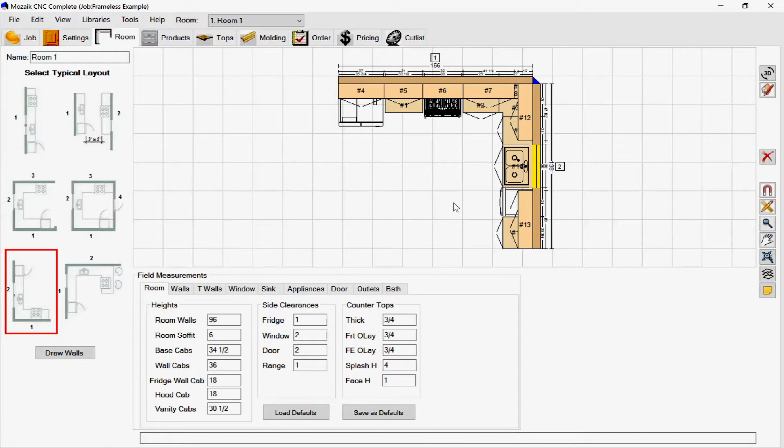Right now, let's skip down here and look at the actual room itself. This is what the job looks like, and let's look at that in 3D. We'll probably have to slide that shadows over because of the graphic card.

All right, so that's what it looks like. There's the kitchen that's already designed. So that's a good place to start, but let's back up here.

We go back here to the Settings tab, and basically the settings determine all the little details about how this is done, what kind of doors it has, what kind of hardware you're going to use, all those things. It also has a concept of what we call a material template. A material template simply says, this is what I make each part of the cabinet.

That's what determines that. In fact, let's deviate from this a little bit, and let's go to the libraries and look at 2 different libraries. The first one is materials. Now, these are the materials that we're going to use. For instance, the first one's a 3/4 plywood. It's 48 by 96. The thickness is 3/4.

And the other thing here, these other things you see here are the trims. Like, I probably would set the trims to 1/8. It just saves material. Now here's what a trim is: it means this is how close I can nest a part to the edge of the material. So 1/8 of an inch is plenty close, right?

So you go through here and you basically set these materials up to match the materials you use. Then there's another concept, and that's called a material template. And here's what this is: it basically says what each part is made out of. So you notice how it picked up these thicknesses here - it automatically updated that thickness. So basically, that's the material library and the material templates.

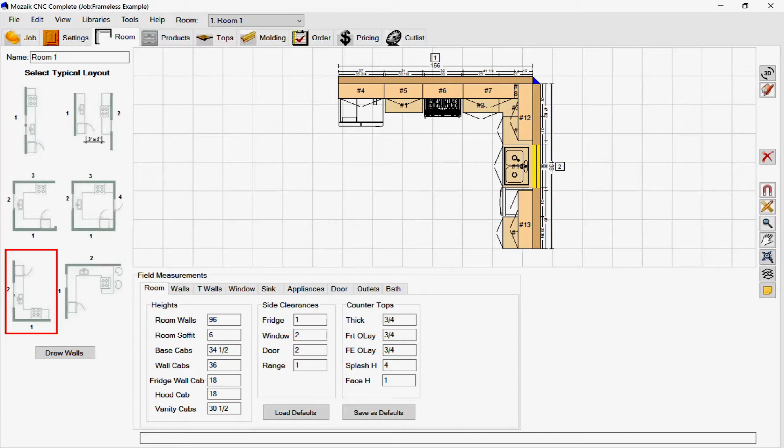We progress on through here, we see a product tab, and let's just pick - when we get to the product tab, we can actually look at the front. So let's pick that cabinet, and let's go edit. And that gets us for the cabinet editor, and then we can kind of look at stuff.

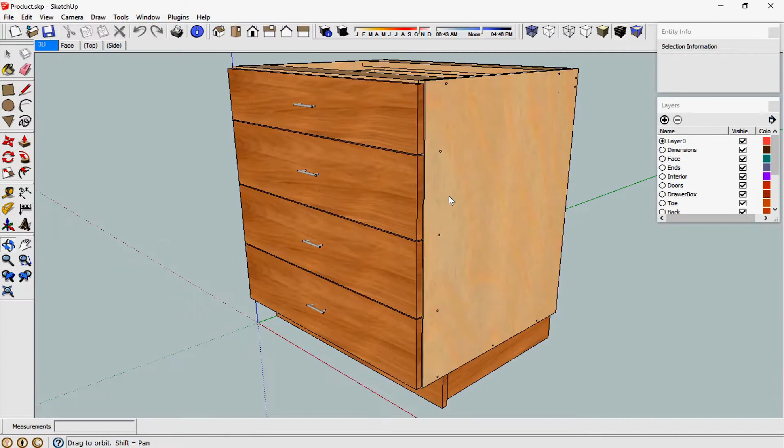Let's go to SketchUp this time. All right, now this is looking at the cabinet in SketchUp. Now the first time you open SketchUp, you may have some default screens that you have to say don't open at startup.

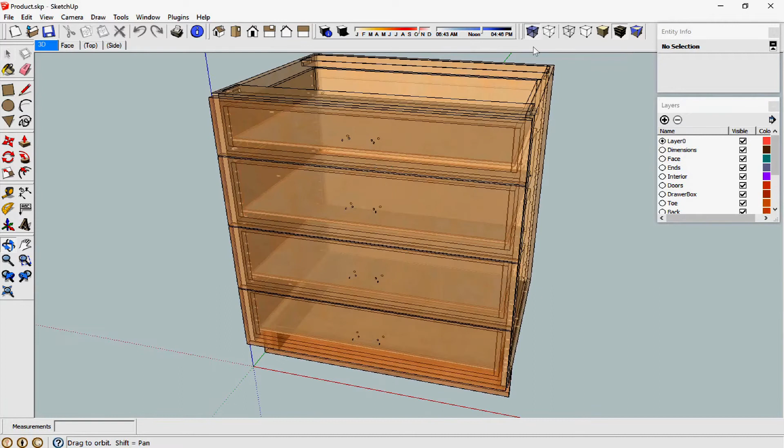Now there's some things I've added also in SketchUp and on the toolbars, and that's some of these toolbars where you can actually see through. All right, I'm actually going to show you on the toolbar. These are what - I'll leave these up for just a second so you can refer back to this. These are the different things I have clicked on here. And the reason I did that is it just makes it easier. So when you're looking at a cabinet here, especially if we're configuring a cabinet, I want to see what it looks like inside. So that's a really, really, really nice way to do that.

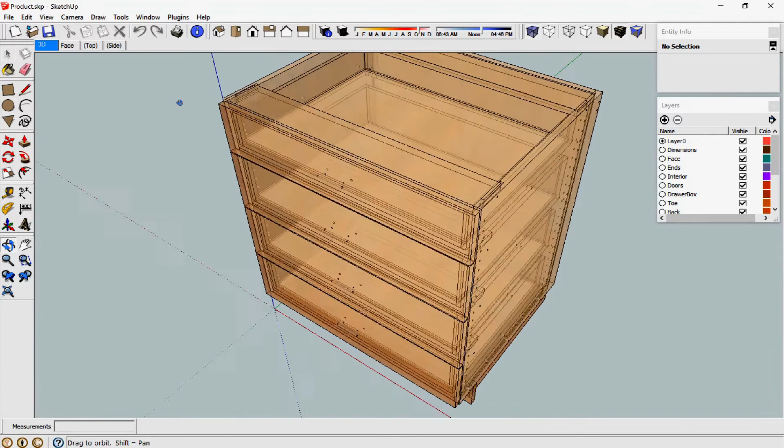All right, so that's SketchUp. Now I could also have viewed the same product over here on the viewer if I wanted to. I could also view it like this. Just another way.

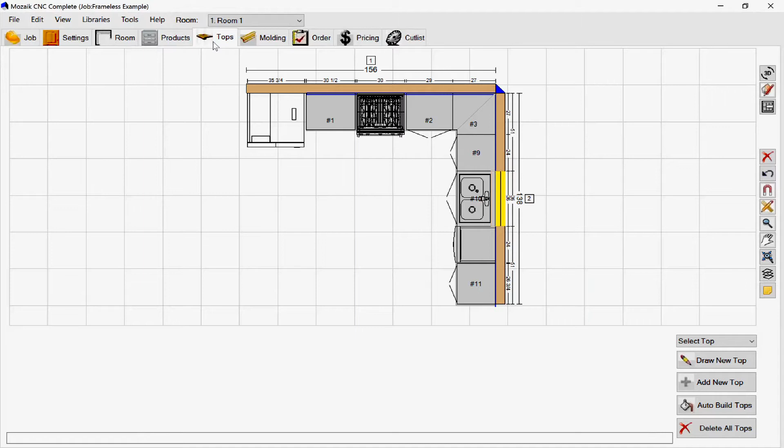Okay, we'll close that. All right, and then as we progress on through here, then you have tops, and of course it builds the countertops on here, and also moldings. So you can actually have moldings, and we'll look at that once again in the viewer. And we'll get that - so there's your countertops and your molding. So that's all part of a cabinet job, of course.

All right, now there's another thing here called order. Now, right now, this is a list of all the cabinets in that job. We're going to come back to this later because the order tab actually gives you the ability to make cabinets without any pictures. A lot of times you just need a cabinet of a certain size, and so we'll come back to that later.

The pricing tab has to do with the business end of it. We typically wouldn't - that would be something you would work with Mozaik on. And then we get to the cut list tab, and the cut list tab opens up the optimizer.

So we come over to the optimizer. I'm going to select that 3/4 plywood. Now we're beginning to get into the CNC part.

So there's the optimizer. Now there's our material thickness that got carried over from the material catalog. There's the material size, and there's those trims that we put on there. And the next thing I do is optimize it.

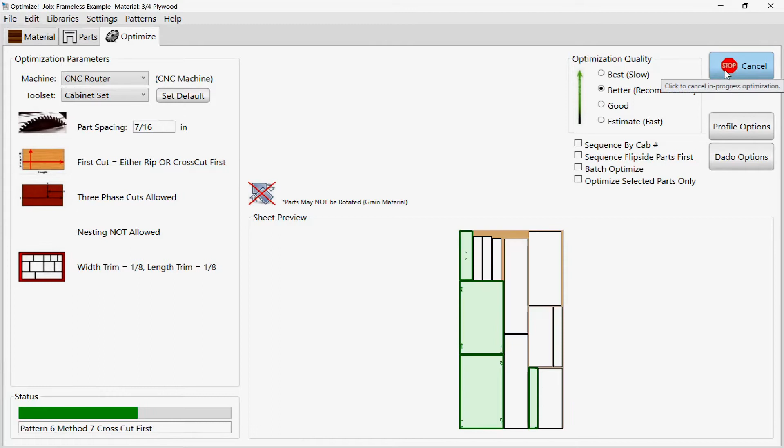Optimizing is another word for nest. And here's what the job looks like, and there's what one of the sheets looks like.

Now I can't really go to G-code because I haven't set that part of it up yet. When we come back in here with our individual base cabinet, we'll set the rest of the CNC stuff up. Now let's focus on actually making your first cabinet on your ShopSabre CNC.

First thing I'm going to do is teach the software how I want to build a cabinet, so that's the construction method. Basically we're going to use what I call a CNC construction method, and I recommend that's where you start. Typically what we do is we build a base cabinet, a wall cabinet, and a tall cabinet, and put them together, and if these all fit, everything else pretty much works.

But let's stick to start with one of our proven methods. Now, the software has unbelievable capability, and you can virtually build anything. So you can create a very unusual construction method, or a cabinet for that matter if you want. But let's keep it to the basics first, because our goal is to cut that first cabinet on your new machine.

Okay, so before we get into a job, let's go up and let's actually configure a base cabinet the way we want it. And here's how I do that.

I go to Libraries, and I select products, and you'll notice up here there's actually a list of different type of catalogs. This is a frameless cabinet catalog, so that's a list of all the different kind of cabinets that are typically you run into in a job. I'm going to select one, and that has to do with a pair of doors and a single drawer, real simple base cabinet. And before we do anything else, let's look at it in SketchUp and see where we start.

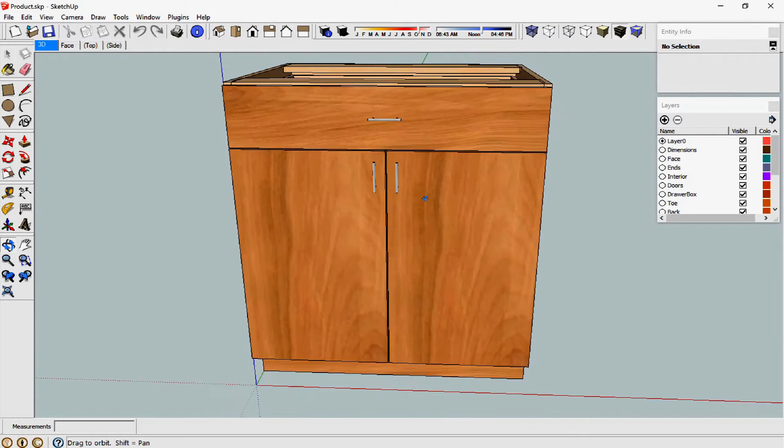There it is. Okay, that looks pretty good, but I see some changes. Yeah, and you see how this toe's cut back here? I don't want that. I actually want my end panel to go all the way to the floor.

Okay, I don't really want a nailer. I want to put a thicker back in there and see what the inside looks like. Yeah, that's probably okay, we'll probably put some screws in there. If you notice a lot of our videos, we screw the cabinets together on unfinished ends, so we'll probably add that feature too. Okay, so that's where we start.

Now, how do you change those? Well, it's really not very hard, so let's go to parameters. First thing we talked about was actually our toes, so let's go into the toe section, that category, and where it says side toe recess, let's make that 0.

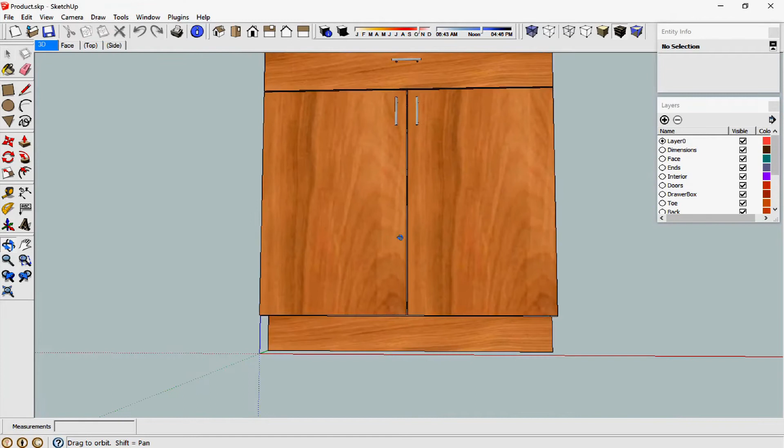Okay, now let's see if it did anything. We'll validate this visually. Okay, now you see our side toe, now it's not stuck back underneath there. Okay, that looks pretty good.

Okay, now let's go back and let's actually tell it to extend the ends to the floor. So I'm going to select a category called ends, base cab ends to floor. Okay, now, oh, by the way, here's something else. If you can't figure out what these are, if you hit this little help button, it shows you what you get if you say yes and what you get if you say no.

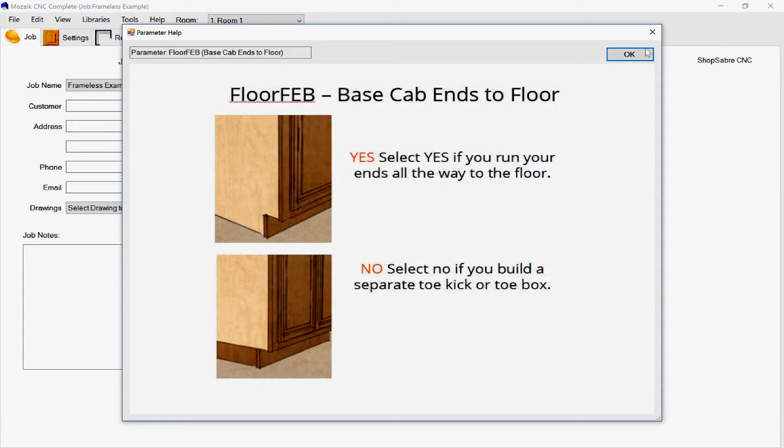All right, so let's say yes, and let's go back and validate that. Now, that should give us what we're looking for our base. And there it is, so that looks good. So now our ends go straight to the floor. Okay, so we got rid of that.

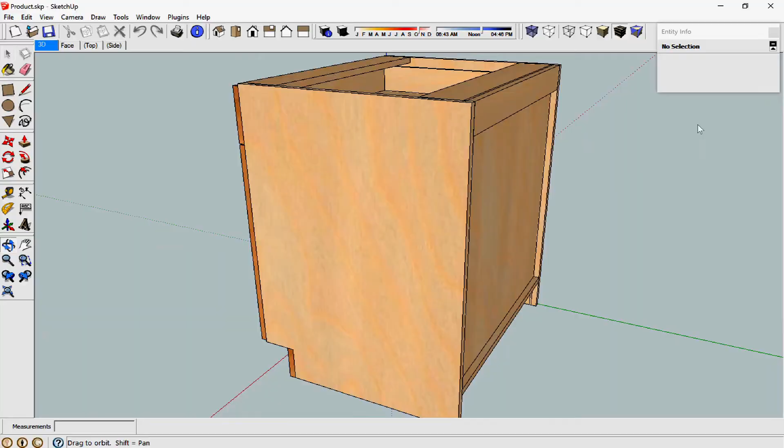Now, let's get rid of this nailer. So what we'll do is we'll go to the nailer category, and if we put the width of the nailer 0, it will disappear. Okay, let's validate that. Okay, and it's gone.

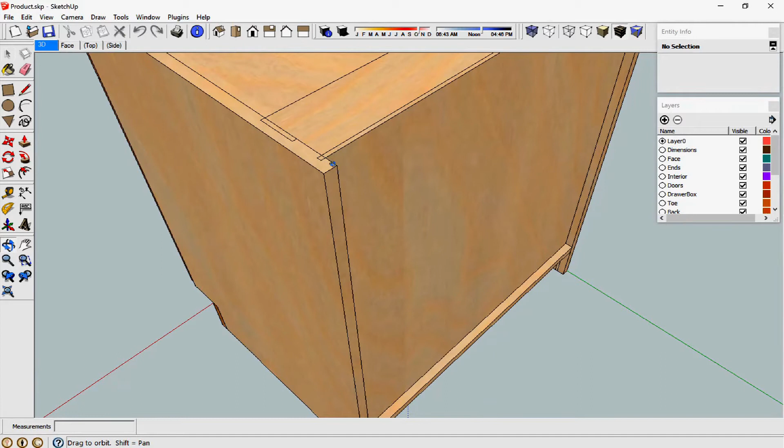Now, here's something else. So I really, when I'm all said and done, my back's going to be the same material as the sides, so it's going to be thicker, and I don't need that much recess. So let's fix that — that's going to be a parameter under backs. And there it is, back recess. Let's change that to 1/4, and let's validate that.

Okay, that's excellent. Now we'll change the back material in the material template, so that'll fix that. Let's look at the inside.

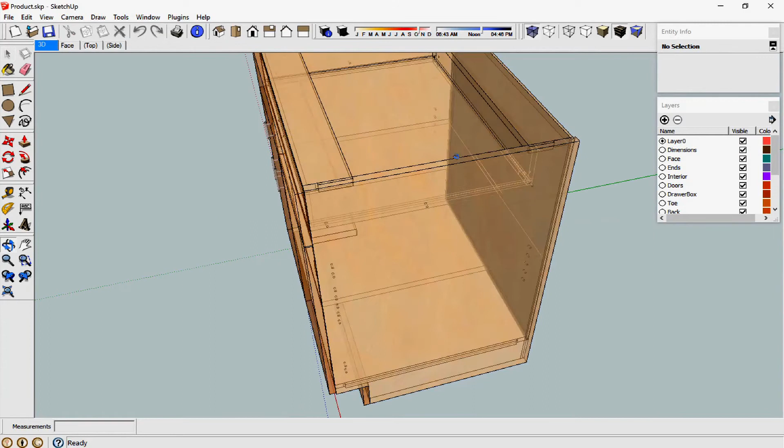Okay, it looks like we've got dado joinery. It's blind dado, that's good. I like that. Now, by the way, let's talk about dados a little bit.

It's really, really critical that your material thickness be correct in the material catalog, because the width of that dado is based on that. What I typically do on this first cabinet is I mic the material and add 5 thousandths, and usually that works out pretty good. If it's too tight, you may not be able to get the cabinet together, but in our case I can live with it a little loose because I can tighten that up. But that's where I start, I add 5 thousandths to what I measure, and that gets me in the ballpark.

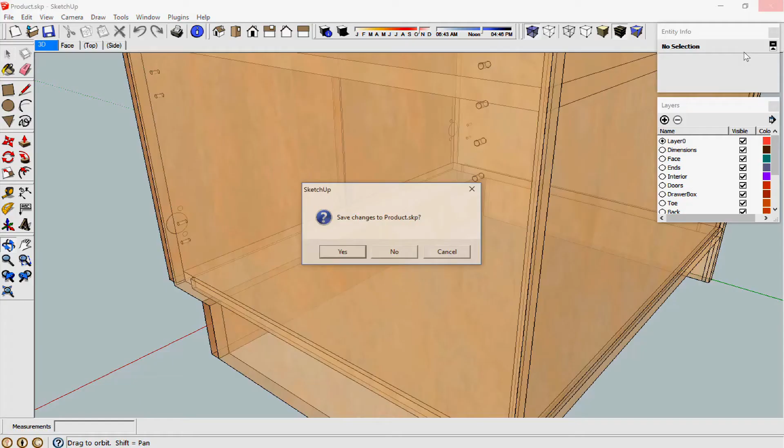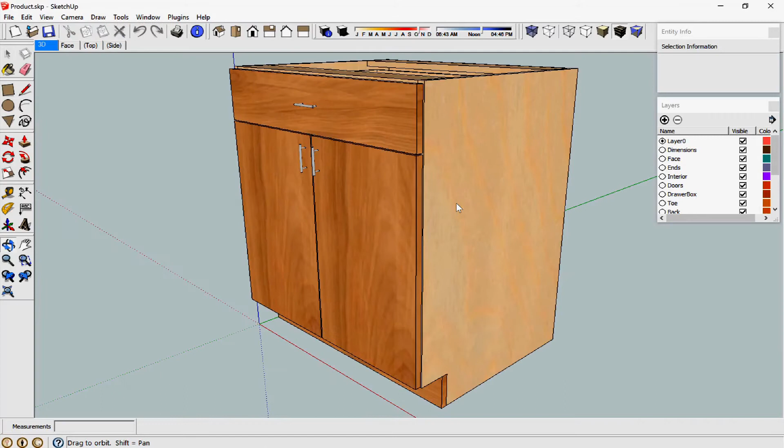Okay, now let's go back and talk about assembly a little bit. Let's go back and look at our cabinet. Now, one of the things CNC gives us the ability to do is actually make things simpler. If you notice, here's a blind dado, so that part's probably going to be real easy to locate.

But you know, if you watch a lot of our videos, I screw the cabinets together and I put those screw holes in there just to make it easy to put the cabinet together if it's an unfinished end. Let me show you how you do that.

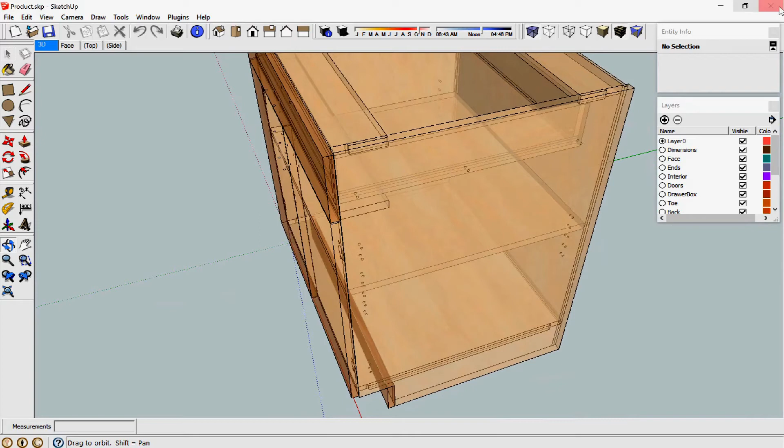Okay, what we're going to do first is I'm going to go to parameters and select fasteners. For the first joint fastener I'm going to apply, it's going to be a Confirmat. Now, a Confirmat's a screw - a fancy screw is what it is. But what I'm interested in is it basically tells the machine to drill a hole, so that's what I'm looking for.

Now, one other thing, there's some logic built into that - it has to do with whether an end is finished or unfinished. So let's go to shape, let's select that end, and let's make sure that it's an unfinished end. Okay, it is. Now let's look at it again.

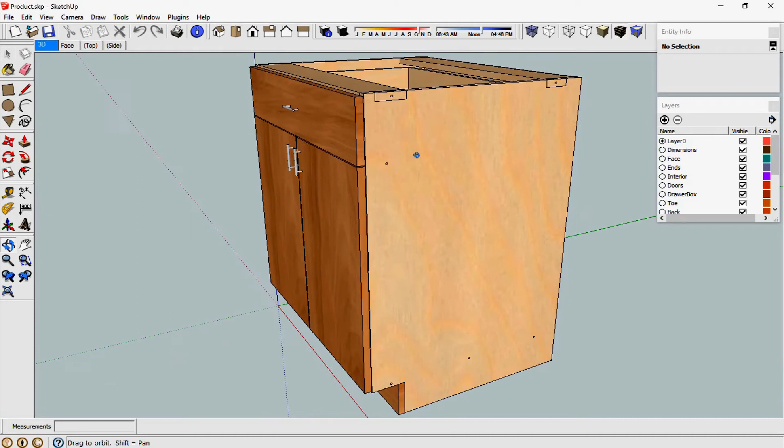All right, now you see these holes. There's a hole here, there's a hole here, there's a hole here. So now, because that's an unfinished end...

...let's change one of those ends back to finish and see if the logic carries through. So let's take this one, let's just make it a standard end, so that would be a right end. Whoops. Let's go back and look at it.

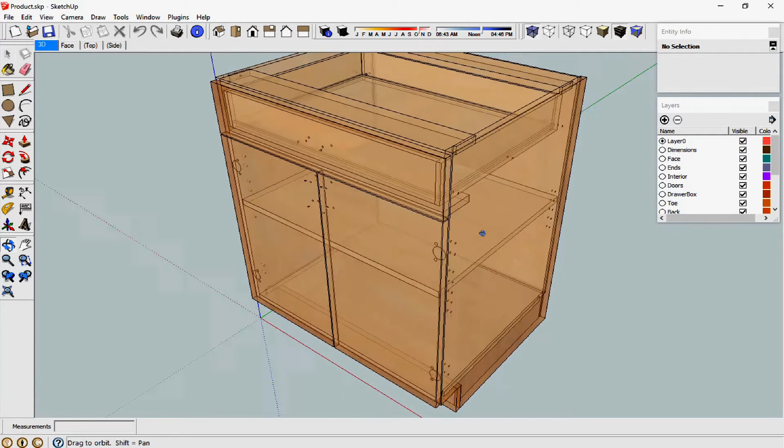All right, now you see the holes are not there. Once again, the logic's built in - if it's a finished end, don't put the holes; if it's unfinished, put it.

Now, you know, in looking at this, I see something that I don't like. You see this stretcher joint here, it's not dadoed into the side, which means I'm going to have a hard time locating it. Let's change that.

Okay, that's determined by a parameter in dados, so we'll select that. And it's this parameter right here, stretcher dado. We'll make that a quarter inch deep also like the others, and then we'll visually validate.

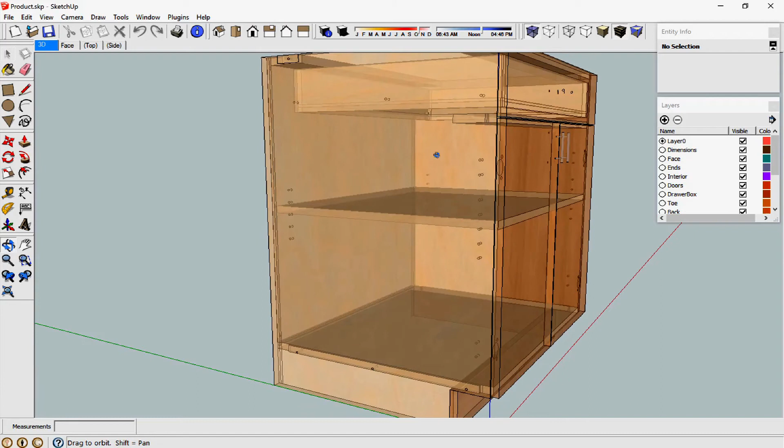And there it is, so that puts that - excellent. That's nice, so that way that part only has one place to fit. Okay, that looks really good. I'm pretty happy with that. All right.

Okay, so we've pretty much got our cabinet configured now. One thing you'll run into sometimes is sometimes in the graphics software it's hard to see the holes, but let me show you how you find out if they're really there.

If I go to this Parts tab, okay, and I go to Unfinished End, and I look at it, I edit it, and I edit Operations, you see there's all the holes. So now you can actually see where those holes are.

Now, I do see something that I don't like. If you notice in these dados, there's holes there too, which is a really good place to talk about what generated those. So let's get rid of those.

All right, let's go back up here and let's talk about another concept. And that concept is, and we'll close this, that concept is called a joint template.

So if I go back to Library and go to Hardware, you'll see guides. This is what determines where the hole locations are in your guides and the hole sizes - hinges, pulls. What I'm looking for is fasteners, joint template, and I'm going to select the one called Confirmat.

When I select Confirmat for the joint, this tab determines all the settings. Here's what I'm looking for: the locations, the joint type. Right now, the joint between the back and the end - the first hole is located, the second hole is located, it's saying 1 inch from the bottom, the third hole is on the center, and the fourth hole is turned off. Well, I don't want any of those holes, so I select each one and just say don't use.

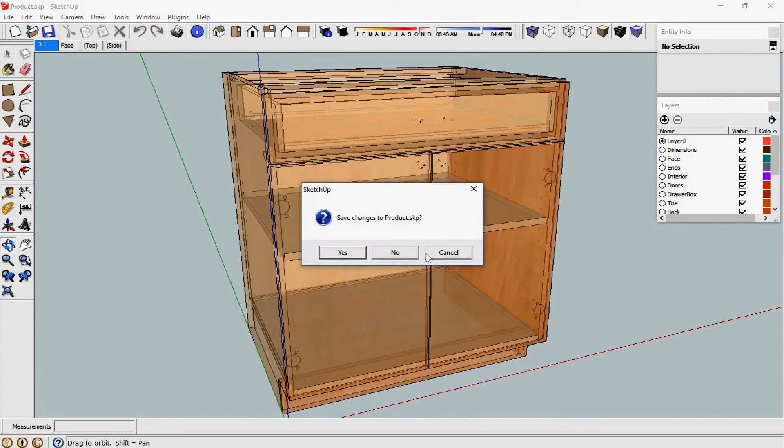And we'll look at it in validation. Can't see them there, but if we look at the part level, we probably can. So let's go to the part level, let's go to that unfinished left end, edit operations, and see they're gone now. So that's what that joint template actually placed those holes - the locations of those assembly holes were put on it there. That looks really good.

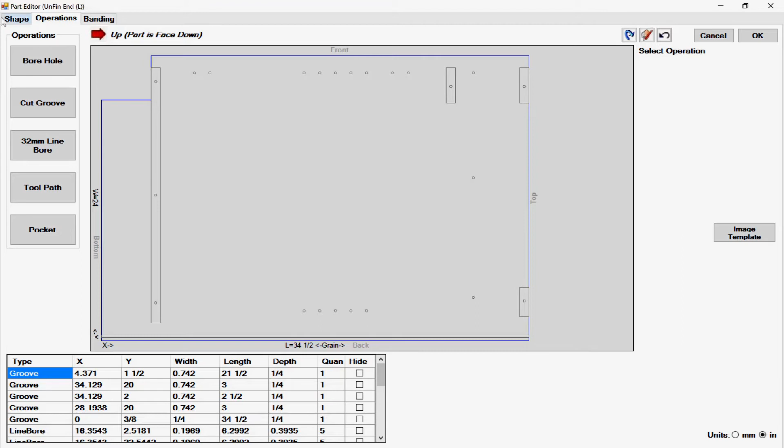So if you look at the part level, a lot of times you can see what operations are actually there. And then you have shape - you can control the shapes and the operations and all that if you needed to. In our case, we don't need to.

Okay, we'll look at a couple more tabs here as we go down through. Information, the size, of course, of the cabinet - once again, that size is probably going to come from somewhere else. The shape, the face - now when you customize the cabinet, you customize the face first, then the inside. So the interior, the parameters, we won't get into too much of that at this point.

What we're trying to do now is to actually create our first cabinet. So let's say I'm happy with all that. Now let's actually go to the next step and create a job with that cabinet in it, and that allows us to take it out to the optimizer and eventually set the machine up and cut the cabinet out. I've taught the software how I want to build a cabinet. Now it's time to actually construct that cabinet that we want to cut on the ShopSabre CNC.

So here's how I do that. Start out and I say File, New, and I'm going to call this Base Test. That creates the job.

All right, now here's the Settings tab. Now you notice Settings for Room - there's actually two choices here. You would have more if you had more than one room, but in our case, I want to do an order entry, and that brings up an interesting point. You can actually create a cabinet that's part of a design that's going to be printed out as a graphic and all that stuff for a customer, or sometimes you just need to build a list of cabinets of certain sizes and certain designs, so you don't really have to have the pretty picture part.

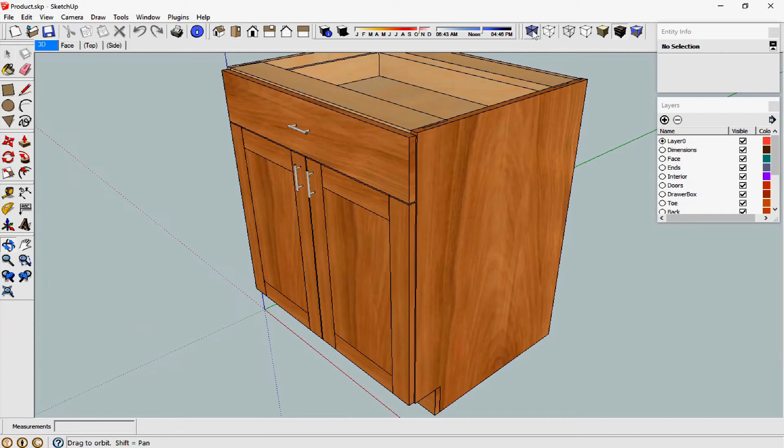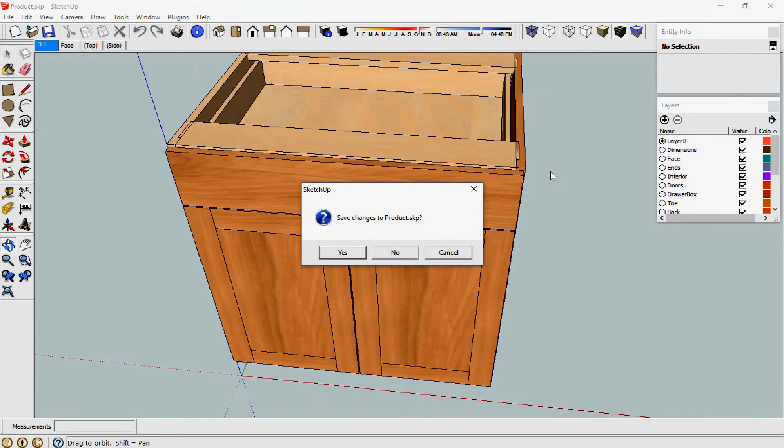Okay, so there's our base cabinet. That should have exactly the same settings we had earlier because we were setting global stuff. You notice now we've got our quarter inch reveal here set back. Our back's the same material, same thickness, so that's good. We've got our holes and unfinished ends. That looks pretty good. That's pretty much the cabinet we were looking for, so we're going to say okay on that.

Now we're going to move down through here. I don't care about pricing, I'm going to go to cut list. And that gets me to the optimizer, and we're going to do the 3/4 inch plywood.

That opens the optimizer, I like to expand it. All right, this all looks correct. There's the material thickness, all that stuff. Okay, let's go to optimize.

Well, I've got a problem here. I've got 2 sheets of material. Well, how do we fix that? Well, why don't we change the size of the cabinet?

So let's close the optimizer. Let's go back over here to order entry and let's change this, instead of 24 inches deep, let's change it to 23. Because what we're trying to do is actually create our sample cabinet, so if it's a little smaller, that's okay. We'll overwrite that. All right, everything looks good.

We'll optimize it, and hopefully that fits on one. Oh, and it did, so now that fits on one sheet. So all of our parts that we need to cut for our cabinet are on one sheet, so that works out pretty good. But we really can't create G-code until we set the machine up, so let's do that next.

We've completed the design part of the project and the optimization. So now we're actually ready to start talking about machine integration, how we configure the software to talk to your ShopSabre CNC. So let me show you how easy that is.

Now go to the actual Setup CNC Router button. You notice in post-process there's nothing there. You say, well, you're going to have that because that's what configures the machine code, and you're going to get that more than likely attached to an email from Mozaik. So what I typically do is download that post and put it on the clipboard.

Let me show you where you put it. So we'll drop back out here to the Windows Explorer. Okay, we're in the Mozaik folder. Double-click Data, double-click CNC, double-click Post. That's where it goes. I right-click and paste it. Now it should be there.

Okay, so let's go back over to Setup CNC. Now on our list we have a post processor, and this one's called ShopSabre MMP, and it says it's for an ATC machine and it includes ARCs. MMP stands for Mitsubishi Motion Platform, we just happen to name the post that. All right, so that's good, that's where the post comes from.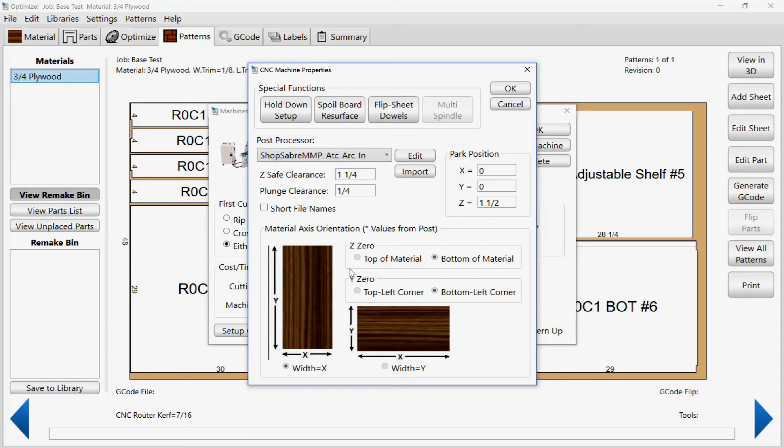Let's look at some other values here. Pretty much all this stuff is already set, so we'll hit OK. Okay, now we have that part set up. Now the next step then is to actually set up the tools in the machine, so let's look at that.

And the new name is ShopSabre Pro 408, let's just call it that. Oops, I better spell it right. 408, so we'll name it that. Now it could be MDF doors, it could be kitchen cabinet, it could be whatever. You can name a specific tool set for whatever the machine use is going to be, but in our case we'll keep it generic.

So we've got a new tool set. All right, so we're going to start out and we're going to put tools in there. Now some people ask, well, what order do you put things? Well, it's arbitrary, but this has to match the way your machine is set up. Historically, what I've always done is started with the order of operations. Normally we're going to drill first, then we're going to do non-through machining, then we're going to cut the parts out.

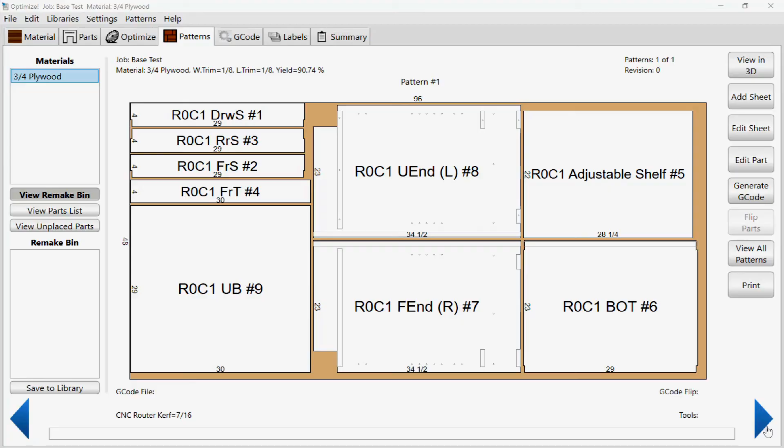You click this button over here that says Generate G-Code, and this screen comes up. We select the tool set that we're going to use. Once we select it, it keeps it. We're going to use that tool set we just created, and the post processor that we loaded, and I hit Calculate. It comes up and it's done the tool pass. Now let's take a closer look at that.

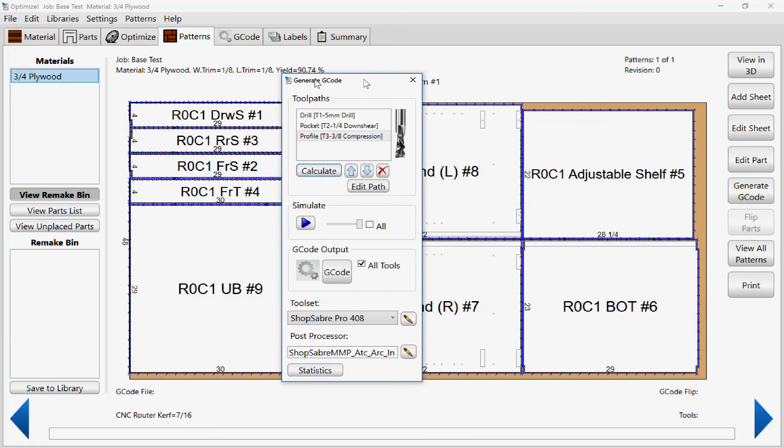So the first tool that it found was the drill, and the second was the downshear and the compression. As we click through these, you'll see that it highlights - see, the holes are highlighted. If I click through that, there's the dados and there's the compression, which is the outside parts.

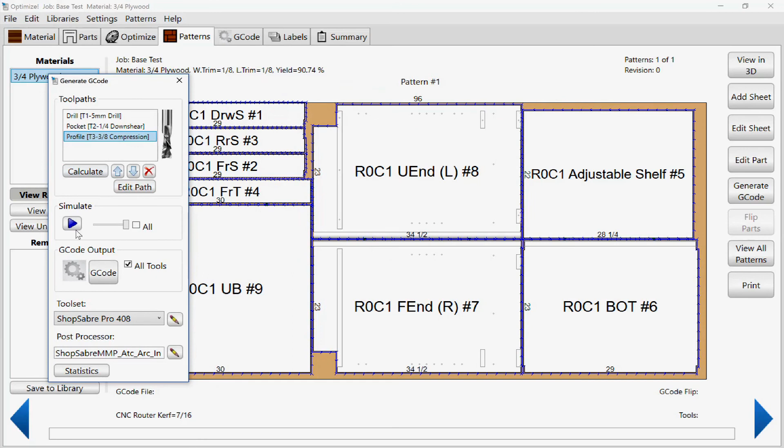Now if we want to, we can say I want to simulate part of that. If you watch this, you'll see it actually simulate. See, those are small parts, so there's the first pass of each one of them. Then it returns back and cuts through the second - so that's the return onion skin. It's basically treating the small parts first, and then it cuts the big ones out. So that validates what we talked about.

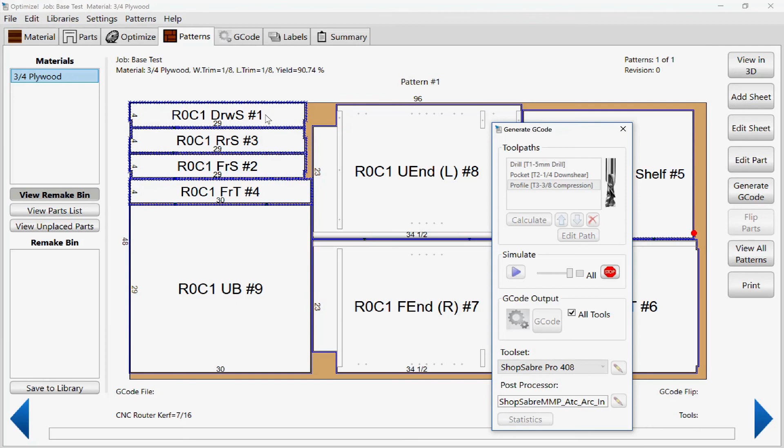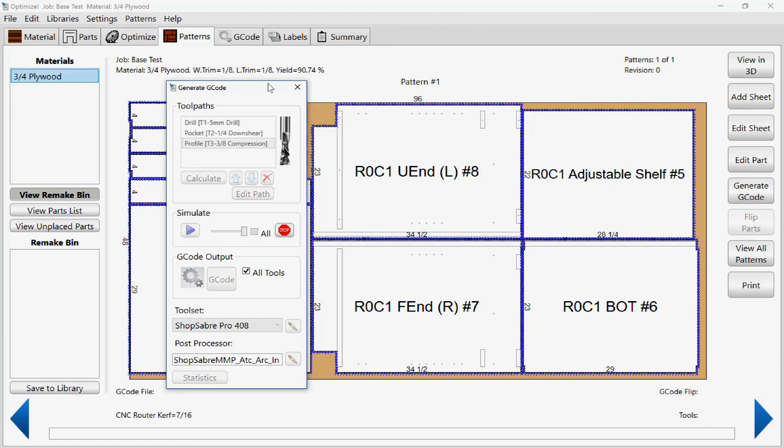So that looks pretty good. All right, the final part there. All right, so that validates all that. There's the last part actually over here - that's our back. Okay, so now after that we hit G-code.